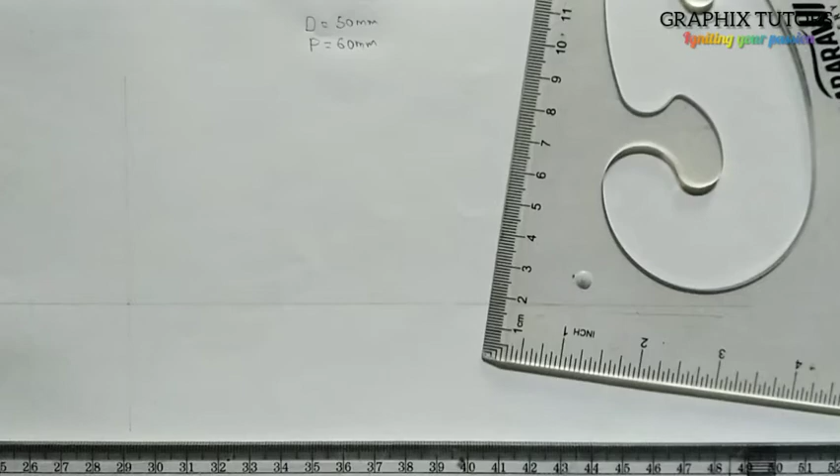Since we are given a 50 mm diameter, it means our radius is 25 mm. So I'm going to measure that 25 mm from my meter rule, and from here to here is 25. So I'll place it at the center and draw my circle this way.

That is the circle. Now since we are not told if it is the right hand or left hand, I will simply just place my cylinder on top, because what I'm drawing now is just the plan of the cylinder. The elevation of the cylinder would be on top of the plan, that is the first angle.

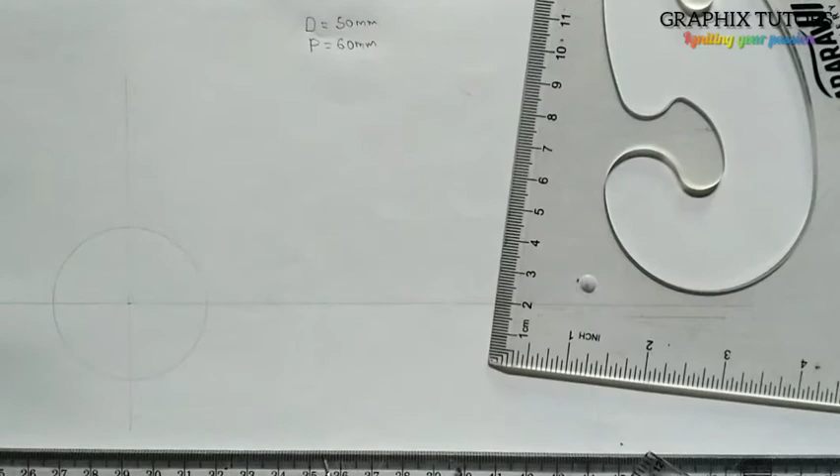So what I will do is just project the end of my circle. Let me show you, you project this point - you can see that, I'll just project it. This point I'll take it up, and I will do it for the other point too, which is this, also this end here. So in doing that, I will have this.

Now the next thing is I will take any distance above the circle. I can decide to take it closer to this place, maybe here, and I will just thicken it. You can see that the circle is thickened, and this guy also is thickened.

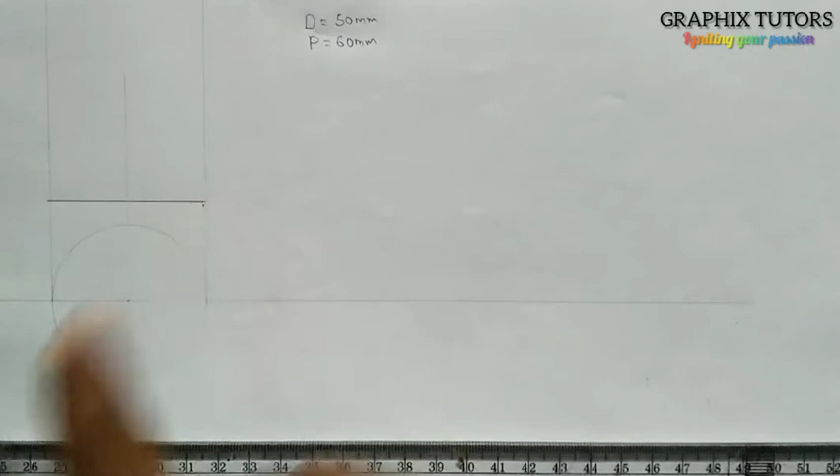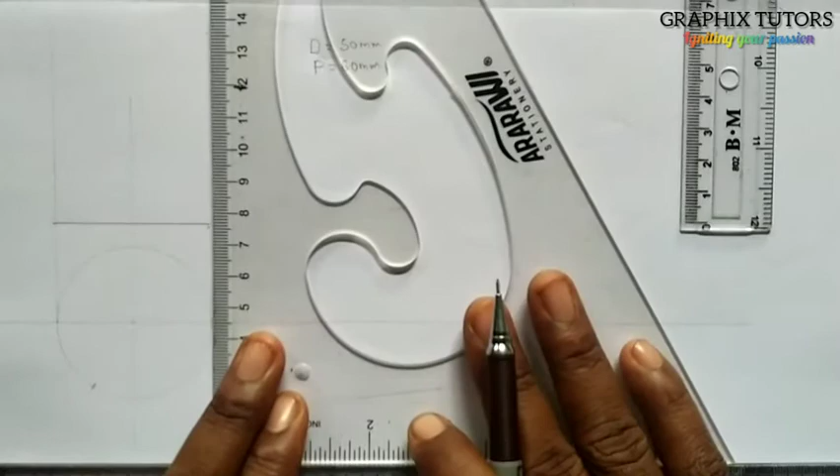So what we'll do is, the pitch is 60, I'm going to measure a height of 60. So you measure the height to be 60, that will represent the pitch. From here to here is my 60, and I'm going to thicken it. So thicken it to this point, and that's 60. And also from here.

And also here too. Now I've successfully done this.

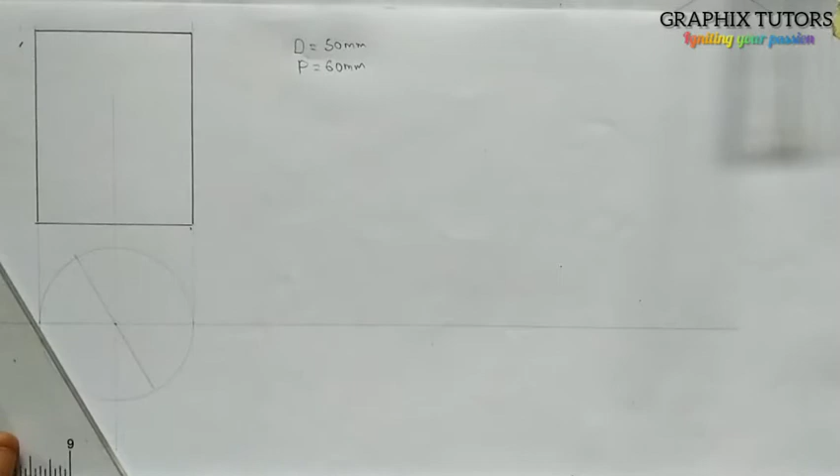Now what I will do is, the pitch is 60, I'm going to divide this circle into 8. So I place my set square and divide it into 8. This is 1. If you have to divide into 8, you're going to use 45 degree - so you're using your 45 degree set square to divide the circle into 8.

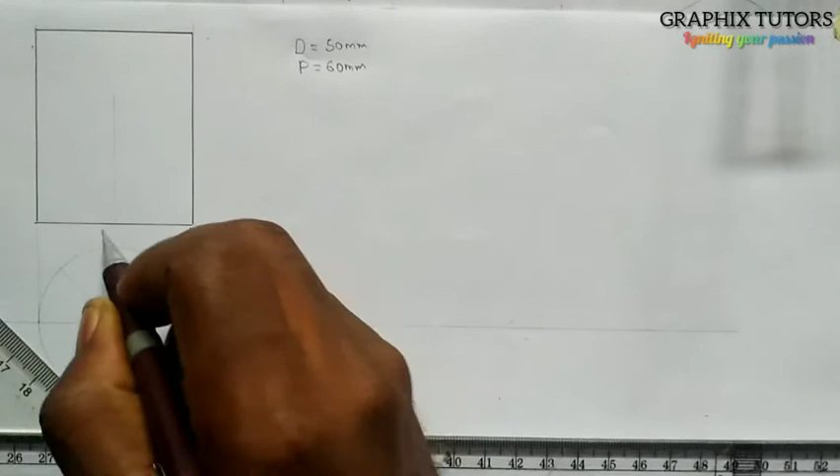So I'll place it at this on my T-square, and I'll move it here. I'm going to have this, and I'll move it here, I'm going to have this. So if you look at it, it's already 8, so I can easily say this is 0, 1, 2, 3, 4, 5, 6, 7, and this is also my 8.

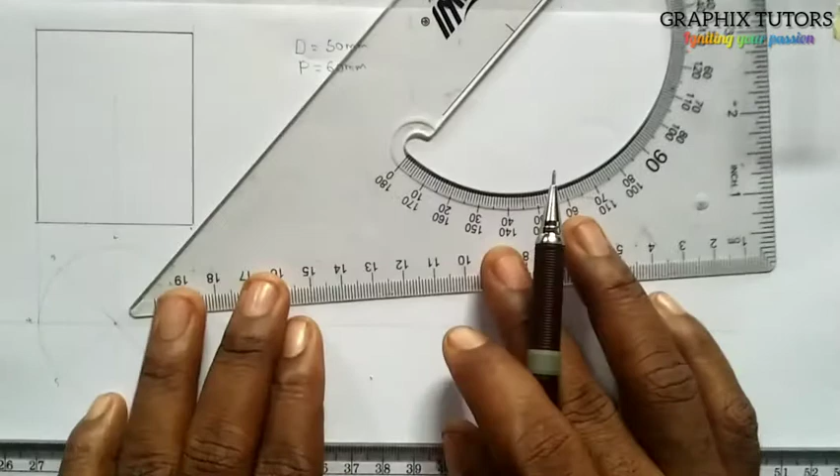Now I'm going to project them up - or before I do that, I'm going to divide this my 60 into 8 equal parts using my line division. So let me just use my line division. At this edge here, I will draw an inclined line like this,

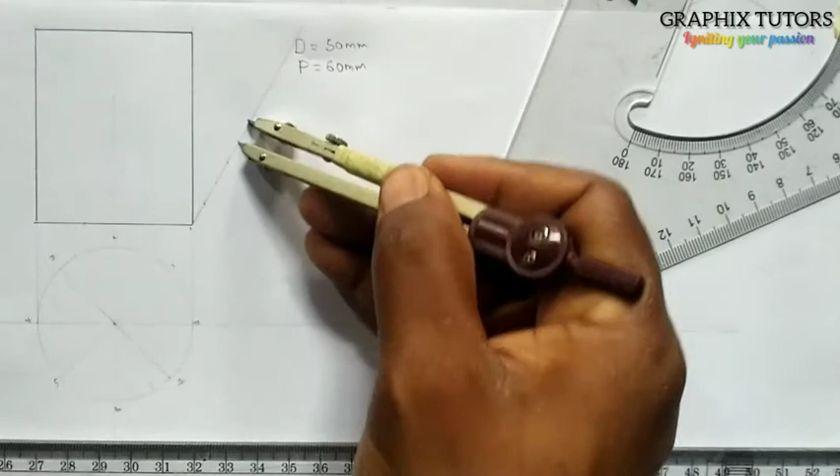and I will use my compass and mark it into 8. So this will be 1, 2, 3, 4, 5, 6, 7, 8. So I'm going to join just like my normal - watch my previous video on line division, you get to understand this. Join the last point to this last point here.

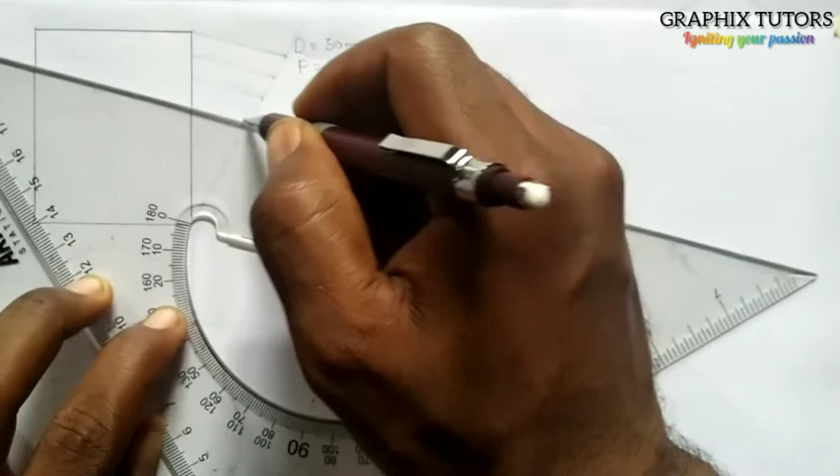Here to here. So if I've done that, I'll take my other set square and place it at the end in here, can see that? And I'll start moving this to this point, to the next point, to the next point, to the next point, to the next point, to the next point, to the next point.

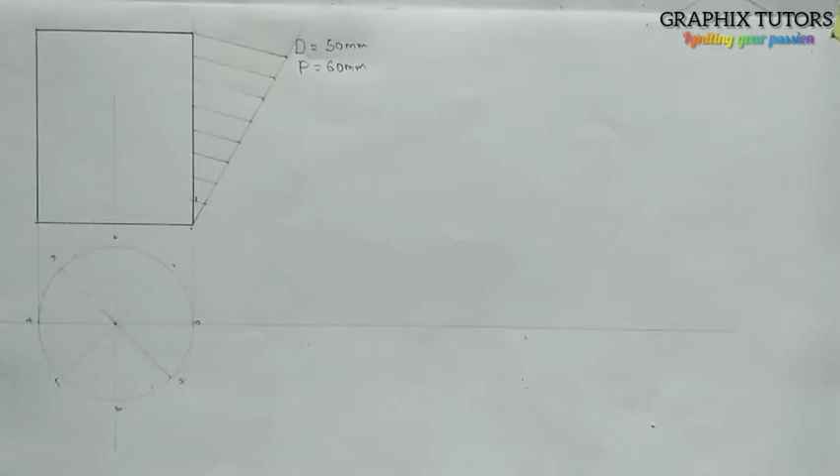So this is what we have. If you are doing that, this will be 0, this will be 1, this will be 2, or I should just move it to this point here. So I'm going to draw my horizontal line like this. This is 1, 2, 3, 4, 5, 6, 7, then what? 8. So I'm going to move.

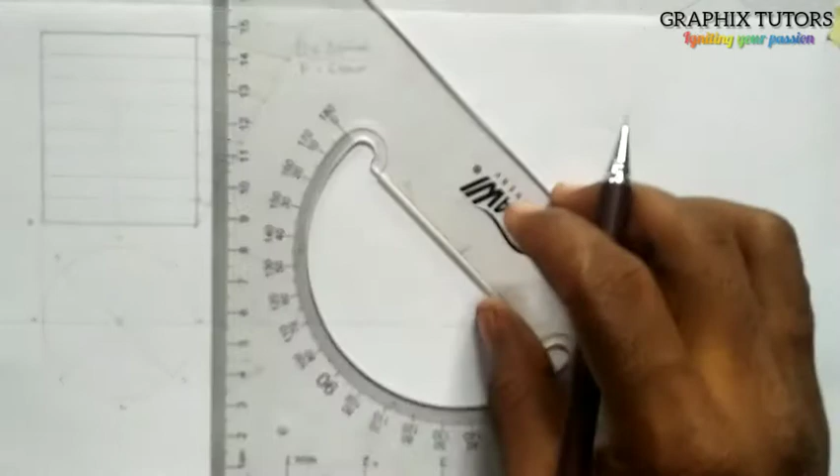So it depends, I can say this is my 0. So 0 can meet it here. Where 0 meets 0 is here, right? That is point 0, this is the line of 0. Now the next thing is, I'll project 1 upward. If you notice, this is 0, this is 1, this is 2, 3, 4, 5, 6, 7, 8. So 0 meets 0, 1 meets 1.

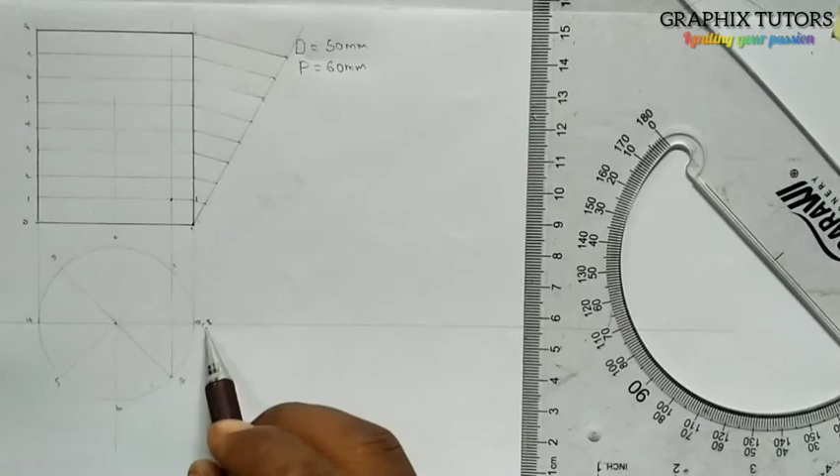0 has 2 points. This is 0 here, and also this is another point, because when you are counting, we say 1, 2, 3, 4, 5, 6, 7, 8, comma what? 0. So 8 and 0 are the same point. So if I mark 0.0 here, also 8 too, I'm going to mark 0.8 here. Or better still, this is 0.0.

This is 1, where 1 meets 1. This is 2, where 2 meets 2. This is 3, where 3 meets 3. I'll project the line of 3 also, move up. So where 3 meet 3, this is 4. 4 will meet 4 here.

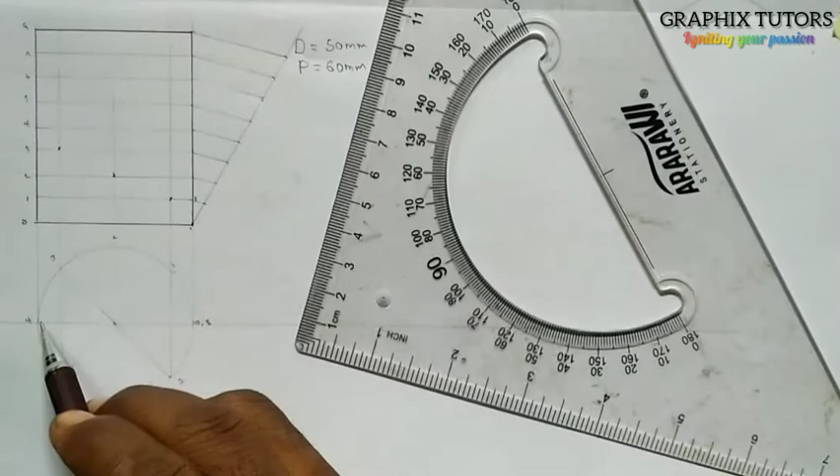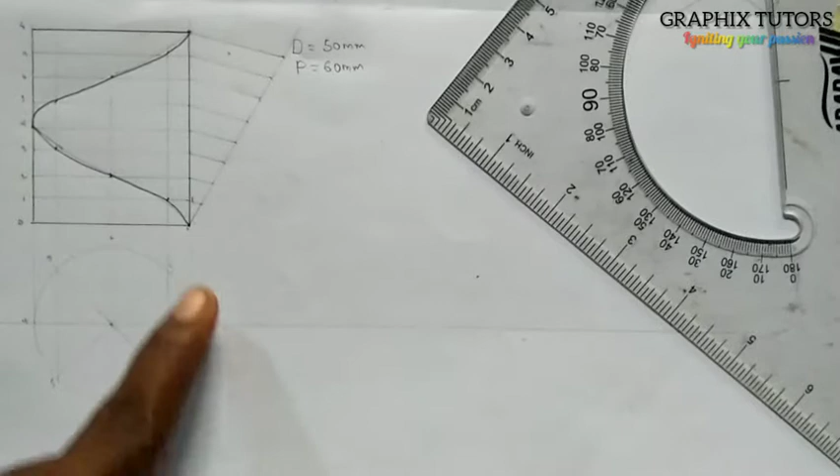This is 5, 5 is also here. This is 6, 6 will be at this point here, right? 7 will be here, then we'll have back to our 8. So we're having this. If you use a French curve, you'll be having this, joining all those points, you're going to have this helix here. So this is what we have here, so that is for number 1.

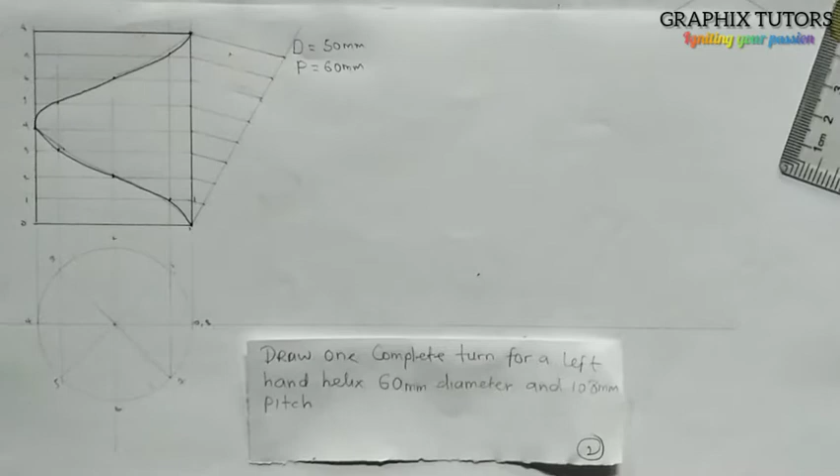So let's try number 2, example 2. It says we should draw one complete turn for a left-hand helix, 60 mm diameter and 108 mm pitch. So what you simply have to do here is, it says left hand. So left hand is, from my previous video I explained something.

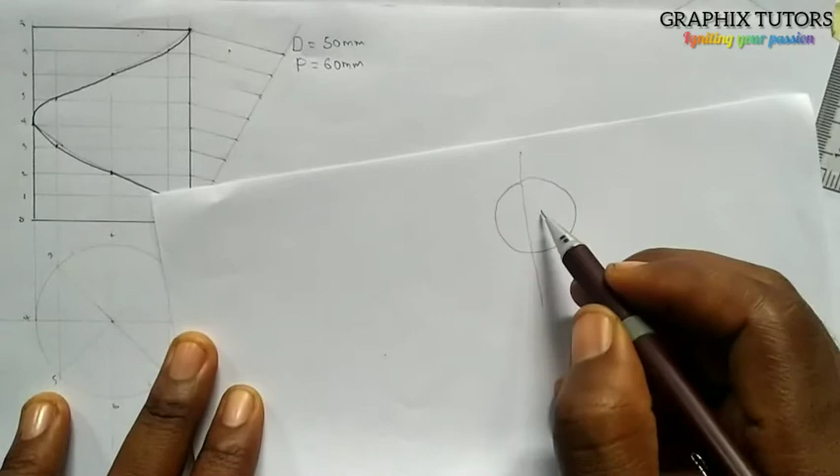I said that if you have a circle this way and divide it into 2, this is our right side and this is our left hand. So if I put this like this, this is right. So if I project it to this point here, this is right hand helix. If I project it like this, this is what? Left hand helix. So it means that it will be facing this direction, right?

So let's do that. At this point here, I'm going to draw my vertical line this way. So at this point, we are given that the diameter of the helix is 60, right? So I'm going to take 30, half of it, which is 30. So you measure the 30 from here.

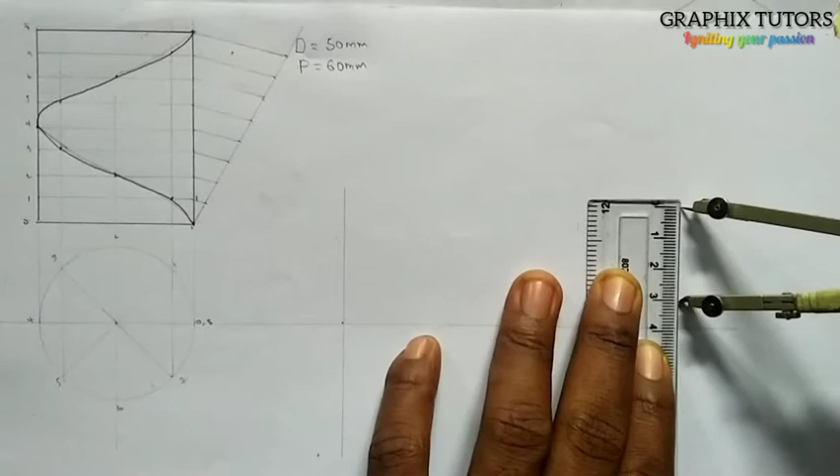0 to 3 is 30, right? That is the radius of the 60mm diameter. And you place it here, and you'll make it facing this direction here, because it says left hand. So it's going to face here, like this, right? And you're going to divide it into as many parts as you want to divide it. So if you like, you divide this into 8 or 12.

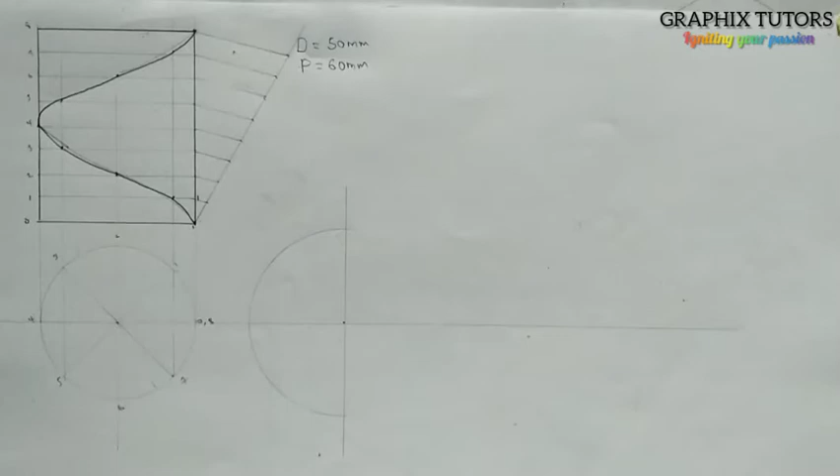The choice is yours. So if I'm using 8, I'm going to use this 45 degrees set square. So this is the 8, that means half of 8, which is 4. The other part is, so from here this will be 0, 1, 2, 3, 4. Now you're going to project this to the other side here. So projecting it, I'm going to be having something like this, and this one too, and this.

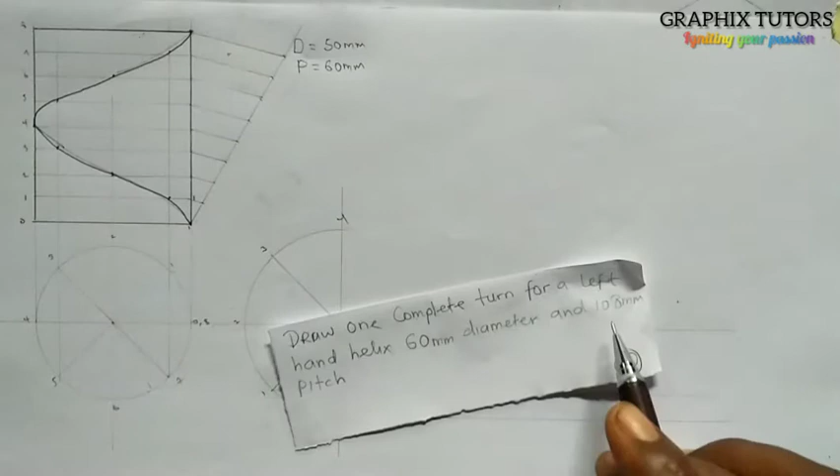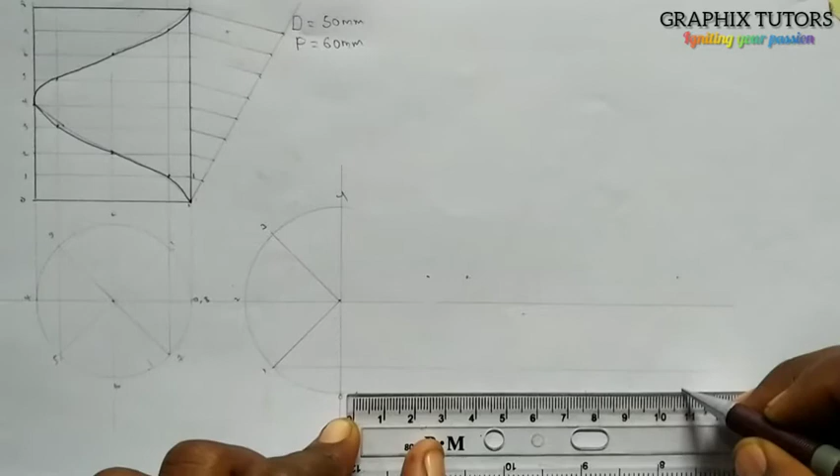But we are told that the pitch is 108. If you look at what we have here, we are told that the pitch is 108. So we are going to measure 108 at this base here. Just pick a point, probably here, away from the circle, maybe 5mm, and you're going to measure 108. Now this is 108 here, at this point here, this 108 here. So you're going to close it up. So if I from here do this, I will raise this up also.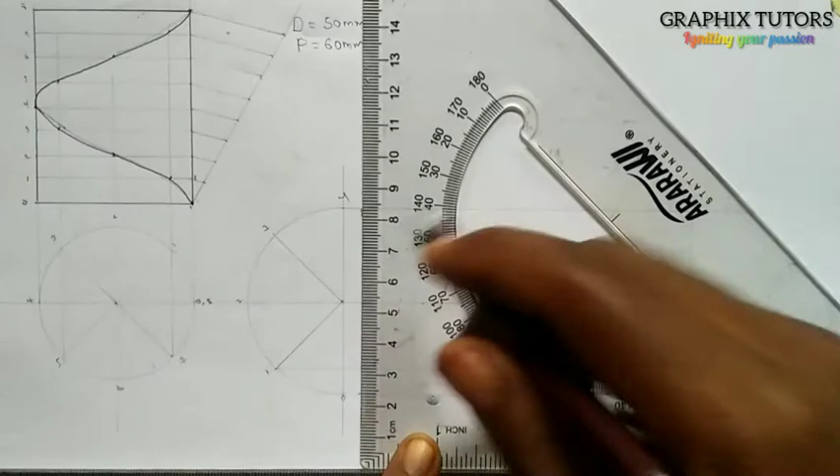And raise here up also, right? And from here to here, we say 108. You're going to divide it into the number of divisions of the circle here. So since this is 4 here, that means the entire circle is 8. So I'll divide here into 8. So 108 divided by 8 will be, you can use your normal line division to do that.

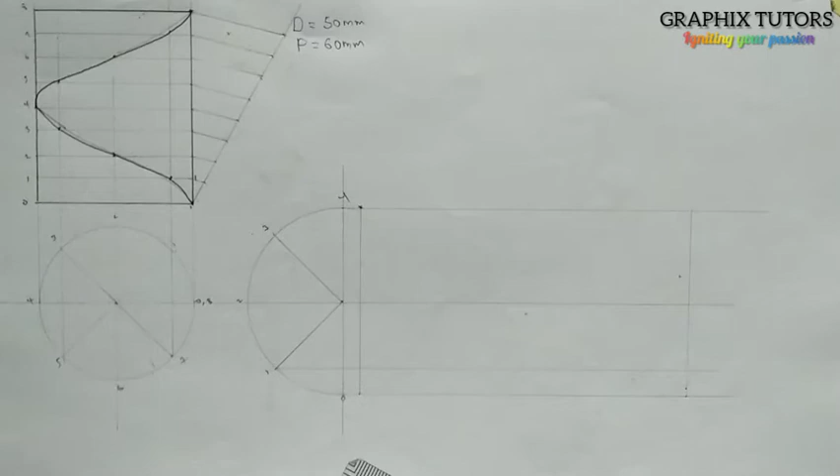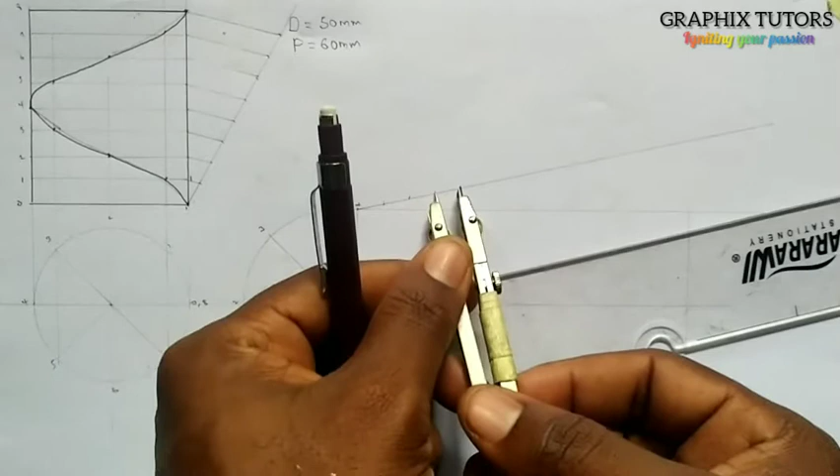So let's do that. I'll just draw a horizontal line this way. I can do it up here if I want to. So I'm going to have this, right? And I'll take my compass, mark from here. This is 1, this is 2, this is 3, this is 4, 5, 6, 7, 8. So do the same thing. You join this last point, this last 8th point here, to that point there, and you join them this way.

So from here, use your other set square, and you join. You start moving it to the next point. We have this. To the next point, we have this. And so on to each next point.

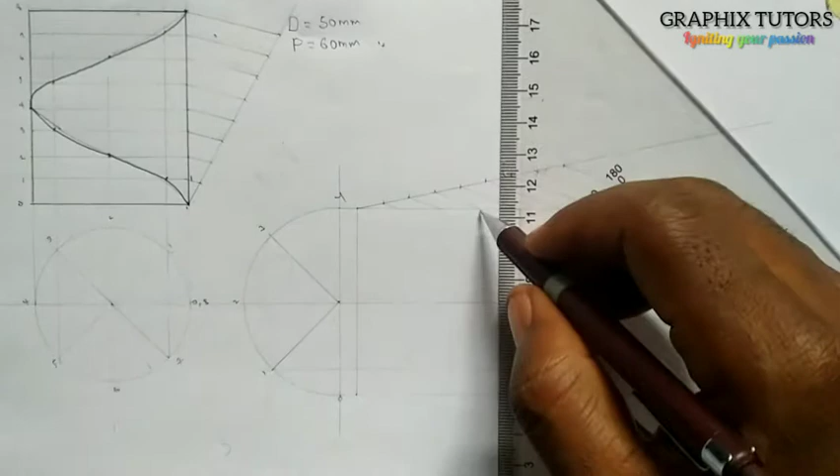So after doing that, we're going to project all those points downward. So projecting this point downward, we're going to have from here to this point. This will be this point. Take it down. This point, we take it down. Each point, we take it down.

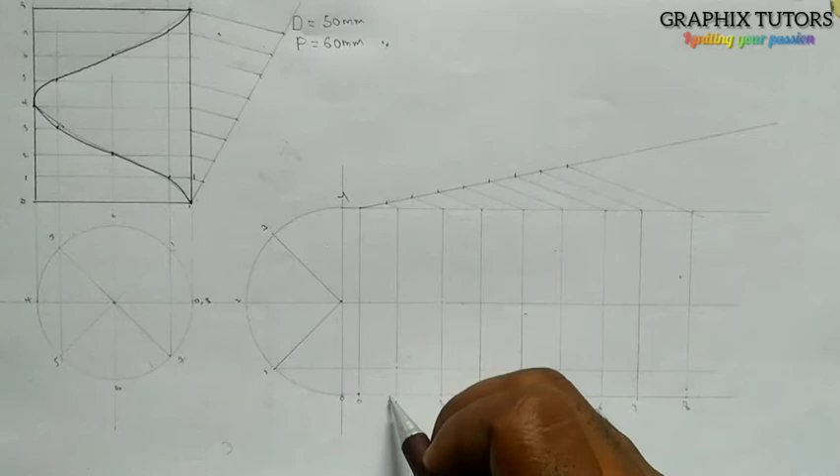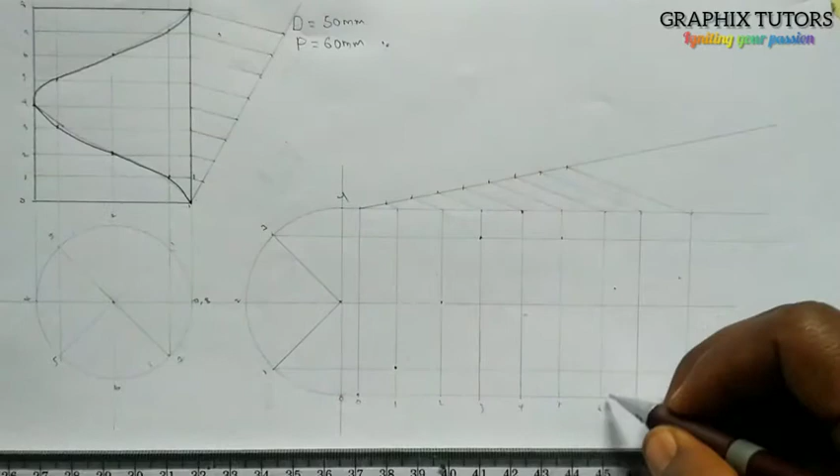So if you do that, this will be 0, 1, 2, 3, 4, 5, 6, 7, 8. It can be 12 if you want to. This is 0, 0 to 0. This is 1 to 1, right? This is 2 to 2. Then 3. Let's project the line of 3, which is this, right? So this is from 3 to 3. This is 4 meeting 4. This is 5, meeting 5. So it will be coming down. This coming down here and coming down here.

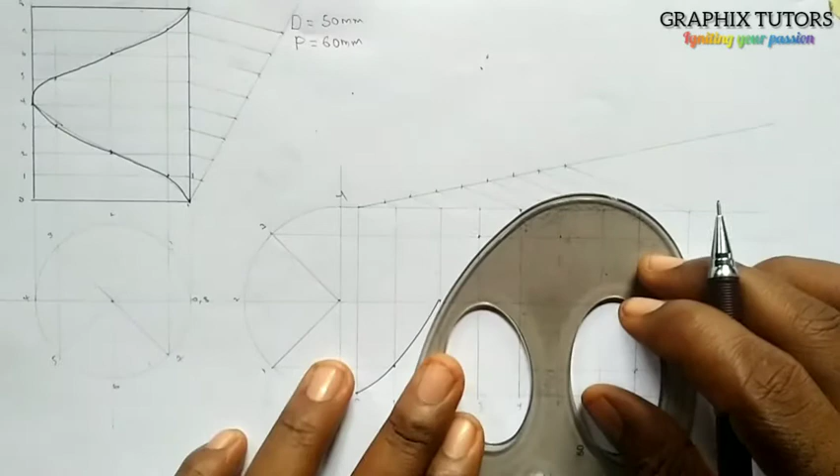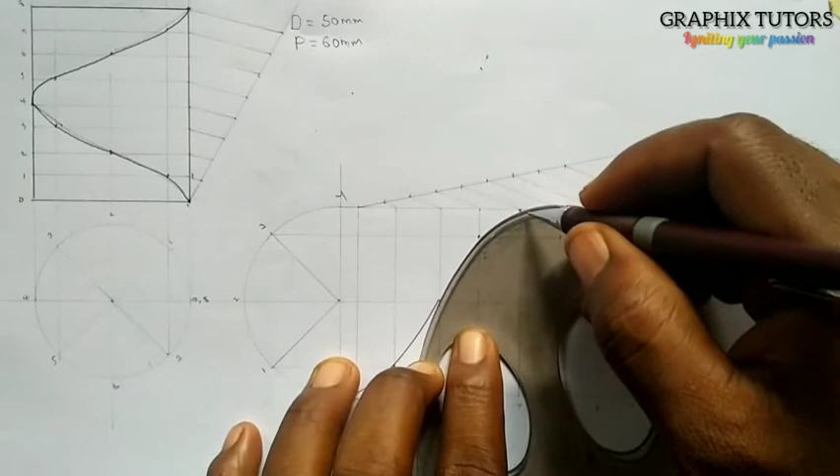So I use French curve to join all those points together. So with your French curve, we're going to do that from here to here. Take 3 points at a time. Then take another 3 points at a time, like this. So from here, you do this. We're having this, and you come here, so 3 points at a time. So you'll be having this.

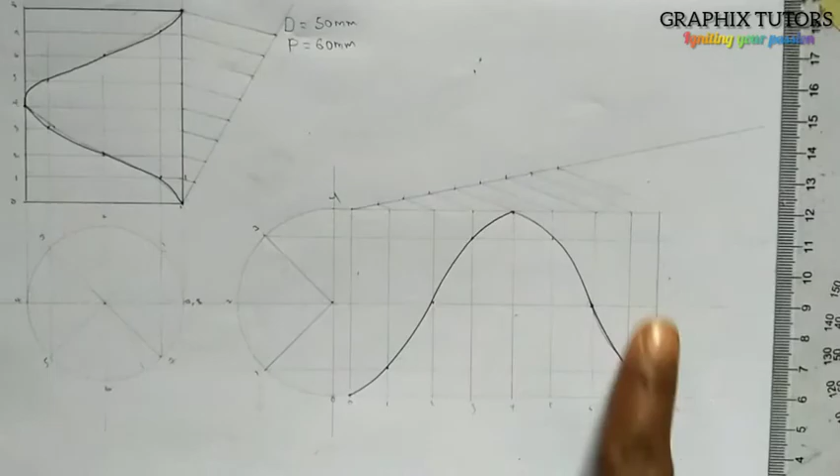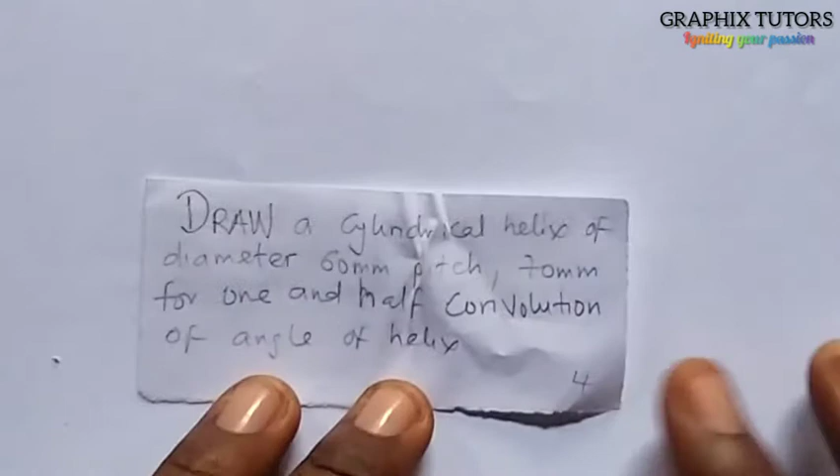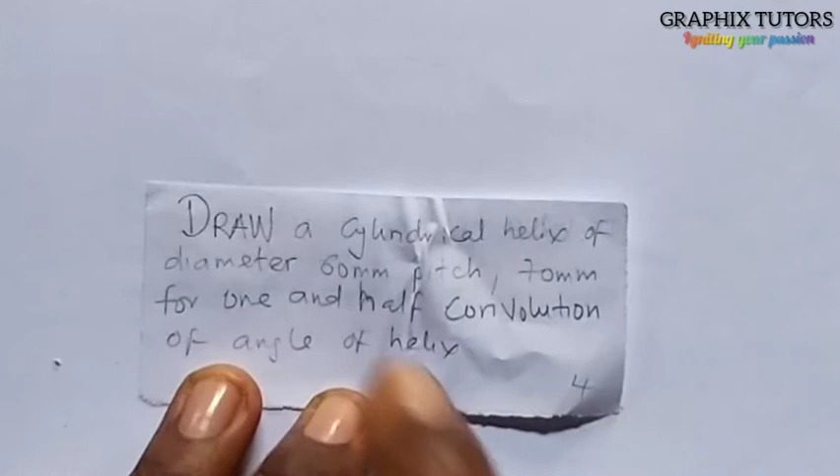So now let's look at this other example. It says draw a cylindric helix of diameter 60 millimeter, pitch 70 millimeter, for 1.5 convolutions, and find the angle. So now we have to draw a cylindric helix of diameter 60 millimeter and pitch of 70 millimeter for 1.5 convolutions, and the angle of helix.

So what you first of all do, like I said earlier, you draw your horizontal line this way, and you draw your vertical line this way. Now you've gotten your center point here, right? Now the diameter of the circle, like I said, is 60 millimeter. You look at it and you use 30, the radius, to draw it.

So I'll measure 30, right? And I'll place it at this point, and I'm going to draw my circle. That is 60 millimeter diameter. And I'm going to divide this into 8 using my 45-degree set square, right? So place it here and I'll divide it into 8. This is 1, and this is 2, and this is what we have. So I can easily say this is 0, 1, 2, 3, 4, 5, 6, 7. I can say here also 8.

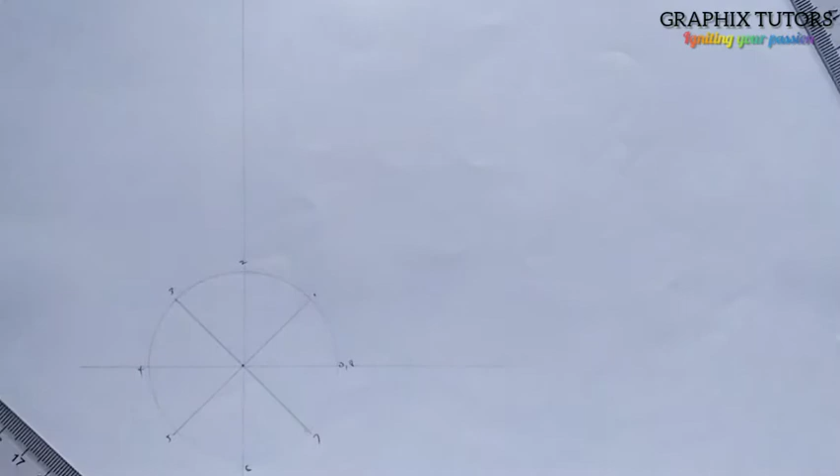Now after doing that, I'm going to project this upward. I'll project it upward. So if I do this, take this up. I'll come here also, I'll do this, I'll take this up.

So at any reasonable distance here, I'm going to just join from here to here. This is what we have here, right? Now if you notice something, we are not given the height of the helix. So how are we going to calculate the height?

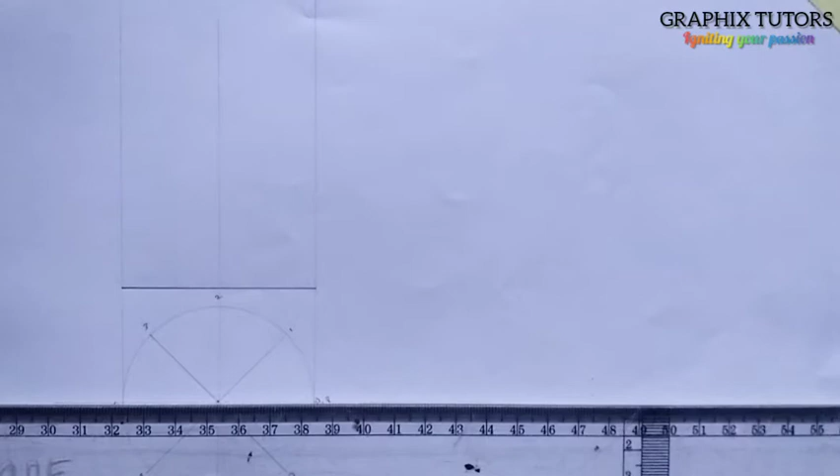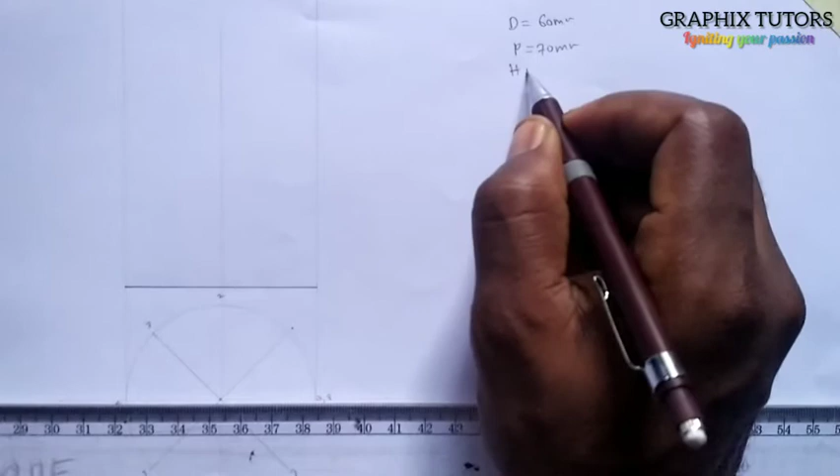Since the diameter D is given to be 60 millimeter and the pitch is given to be 70 millimeter, to get our height, it's given as number of convolutions multiplied by the pitch. Our number of convolutions is given to be 1.5. So you multiply it by the pitch, which is 70. 1.5 times 70 will give us 105 millimeter, if I'm not mistaken.

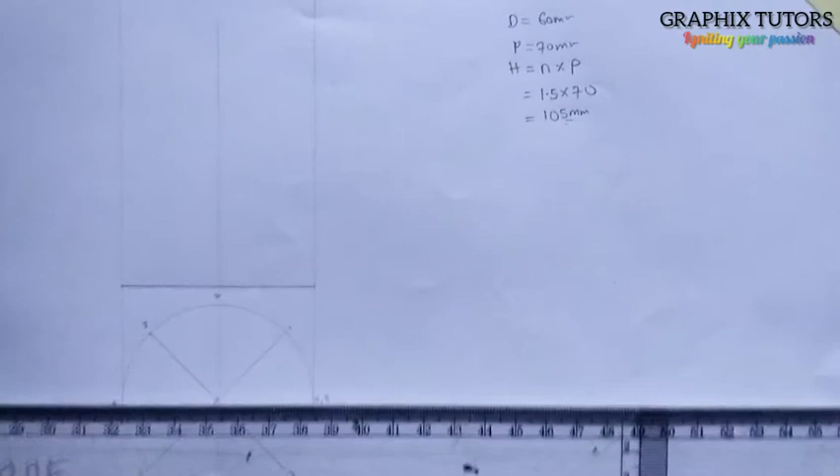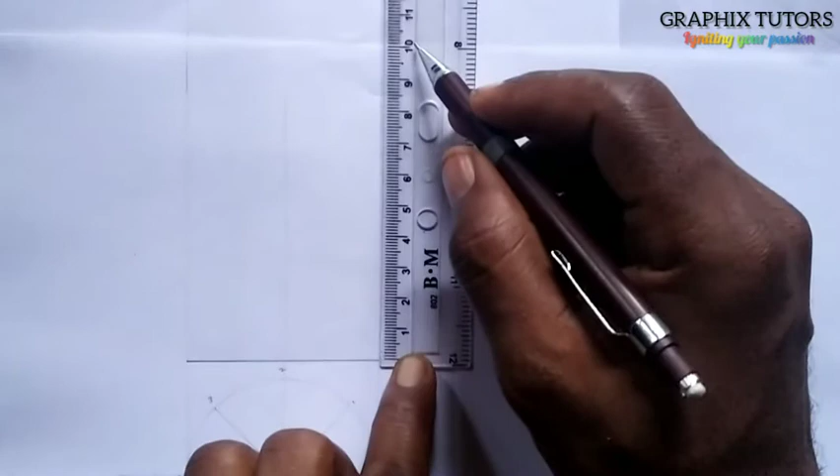Yeah. So our height is 105. From 1 to 10, this is 105 here. So I'm going to join those two together, from here to here. I'm having this. Then I'm going to close it up.

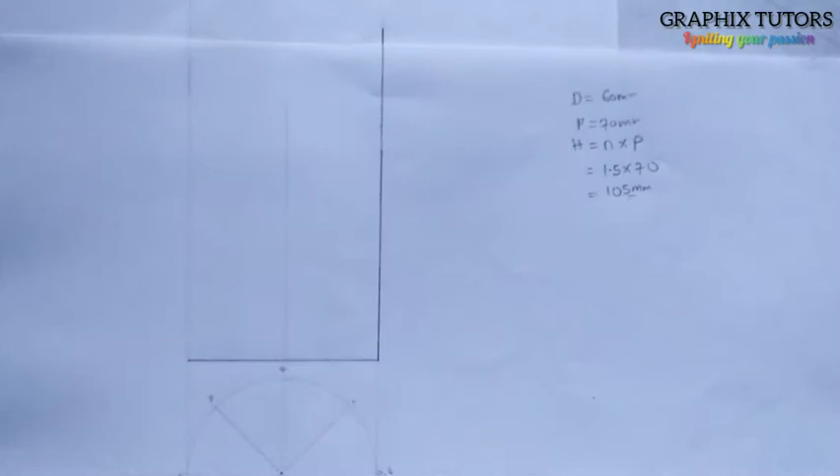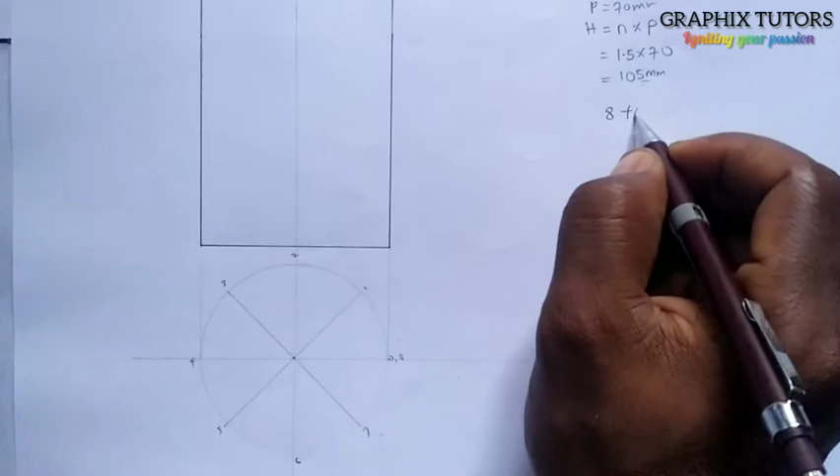So we'll divide the cylinder into 12 because it is 1.5 convolutions, not the normal 8. Why? Because one convolution is from 0 to 8. That is 8. Then half convolution of this is 4, that is 8 divided by 2, plus 4. Let's assume we divide this circle into 12: one convolution is 12, half convolution is 6, 12 plus 6 gives us 18. So we'd divide our cylinder into 18.

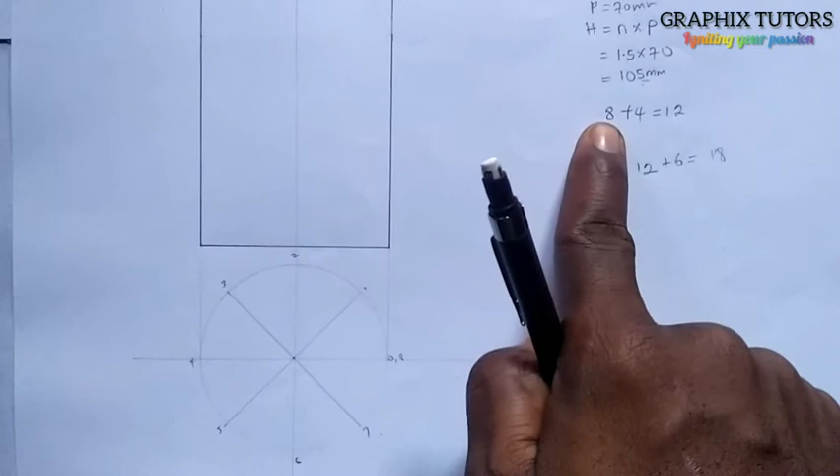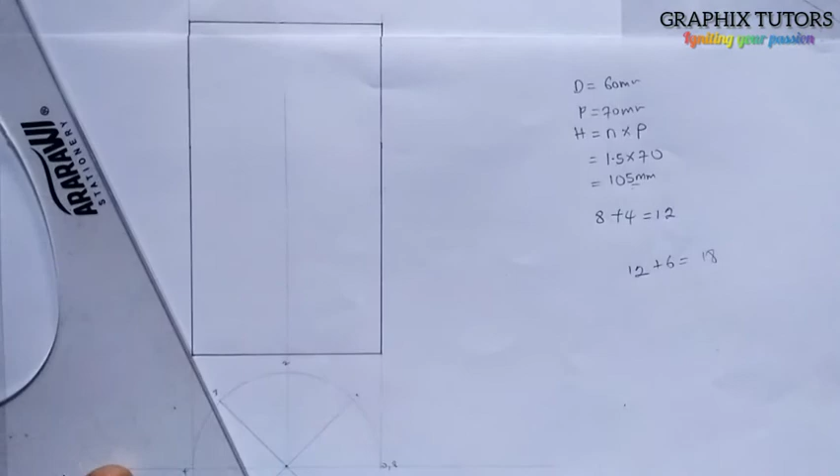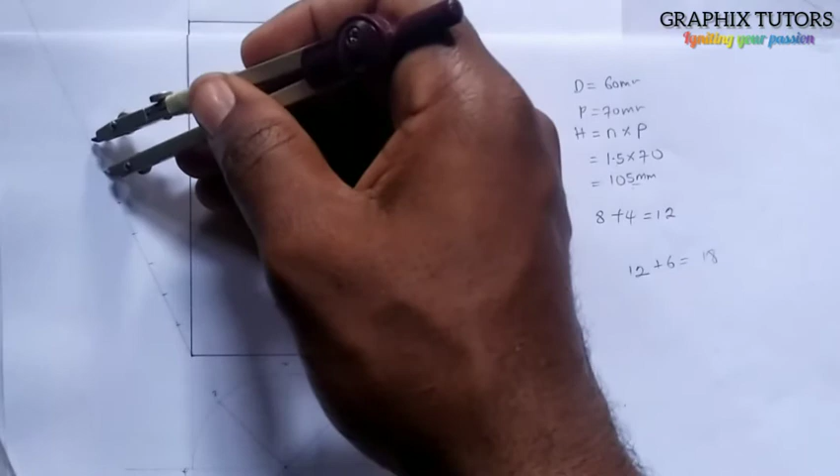But in this case, since we divide into 8, 8 is one convolution. Half, which is the 0.5, is half of the 8, which is 4. So we are dividing this into 12 equal parts, just like what we did earlier. I'll place this way and draw my horizontal line. I'll use my compass and mark 12 here: from 0 to 1, 2, 3, 4, 5, 6, 7, 8, 9, 10, 11. We have 12.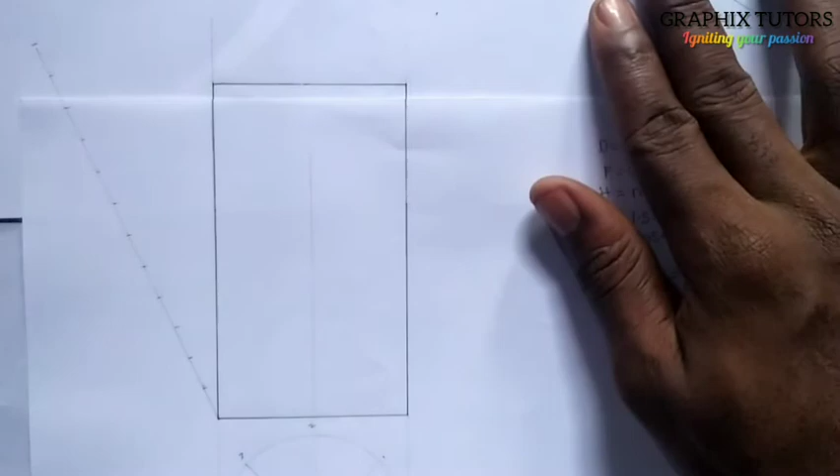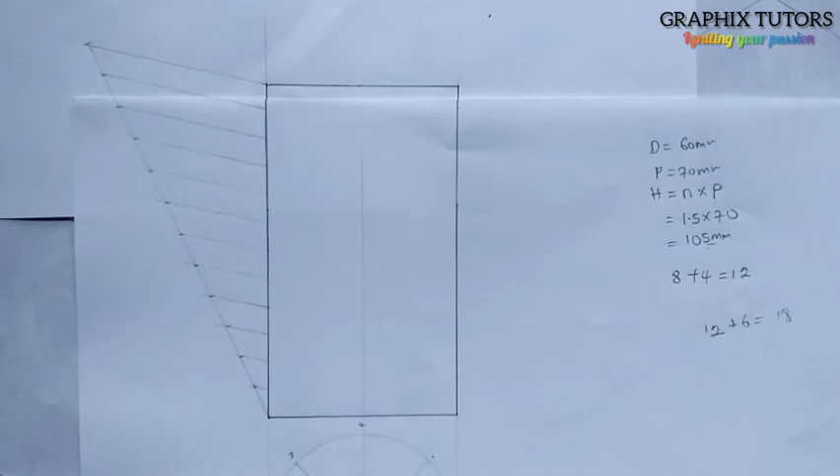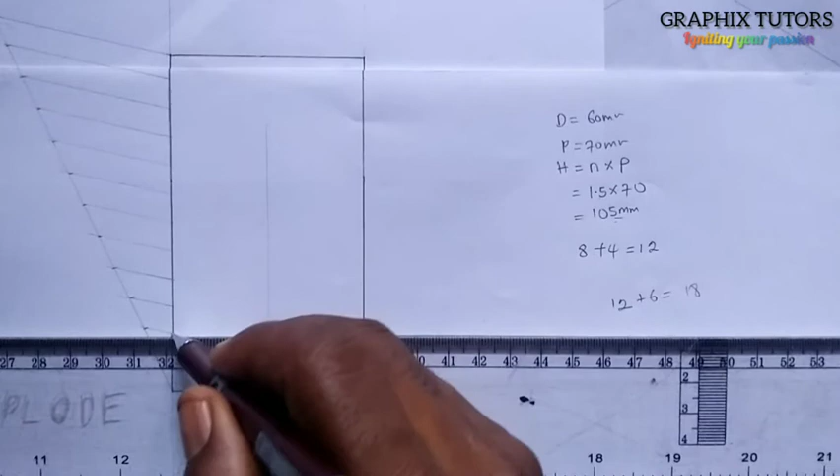We're going to join the last point here with this point here. With your pencil, join here to here, and place your compass at the end if you want to. Dividing it into 12, you use your T-square and join all those points together. Join this to this, this to this, and continue until this is what we have: 0, 1, 2, 3, 4, 5, 6, 7, 8, 9, 10, 11, and 12.

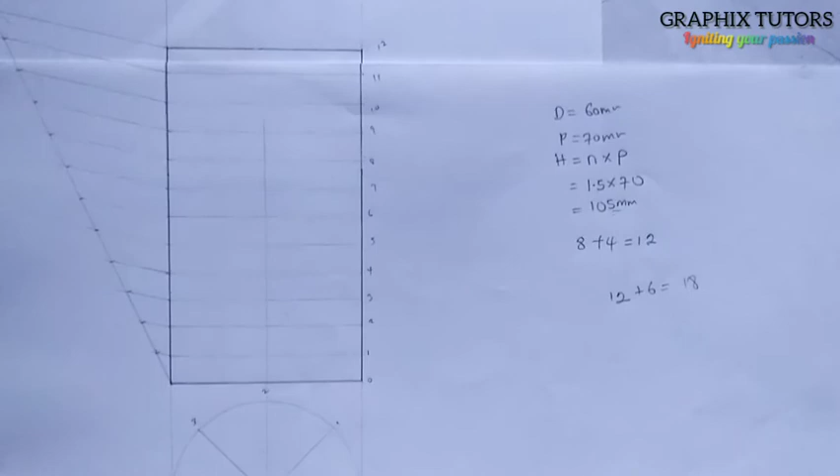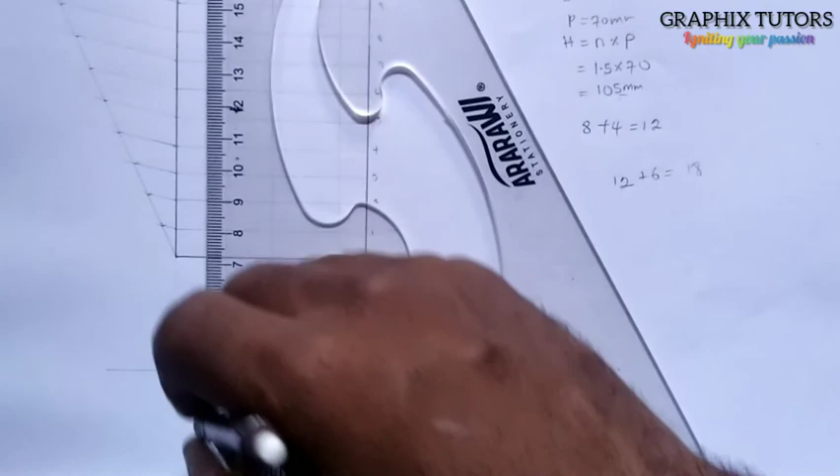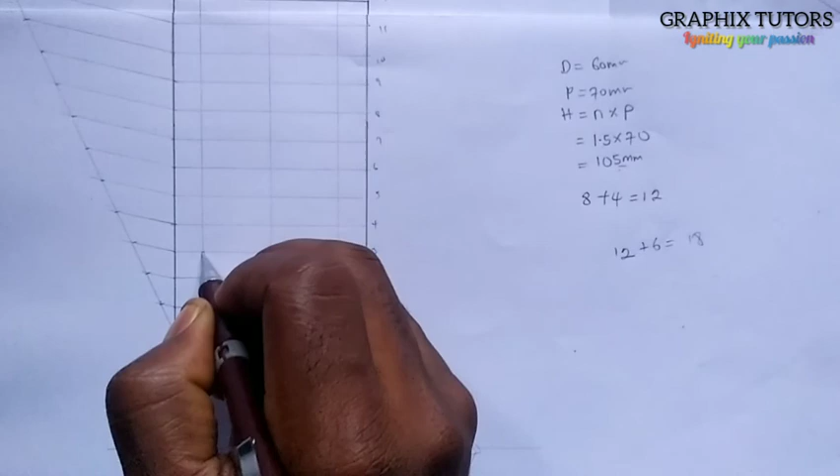Now you're going to project your circle upward. Placing my set square on my T-square, I'm going to project all those points up. Projecting them up, we're having this, right? You can start from 0. This is the next point, the next point, the next point, coming there like that. No two points must be on the line.